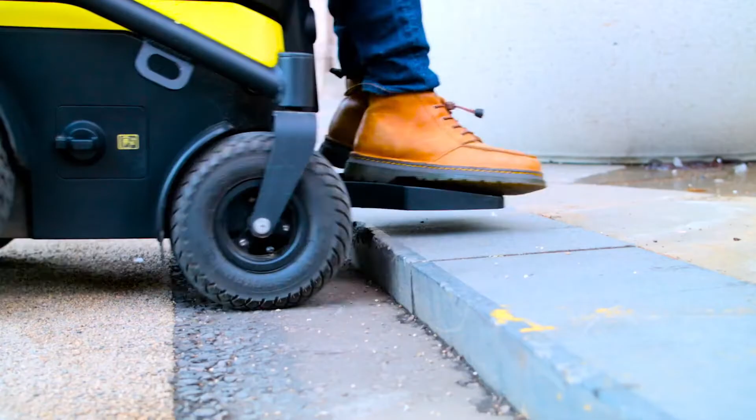Working for Freedom One Life was an opportunity I couldn't refuse. It was the type of job I'd always wanted to get involved in, especially one with such a great backstory, with an inspirational founder who was trying to revolutionise a stagnant marketplace with something really quite innovative, which is going to benefit that user group considerably and allowed people to live the lives they choose.

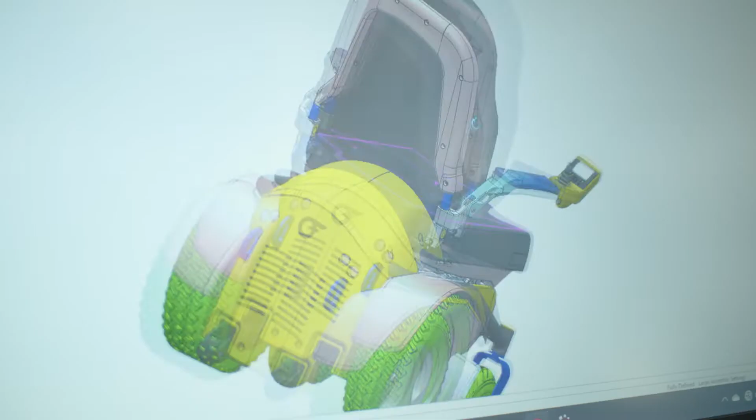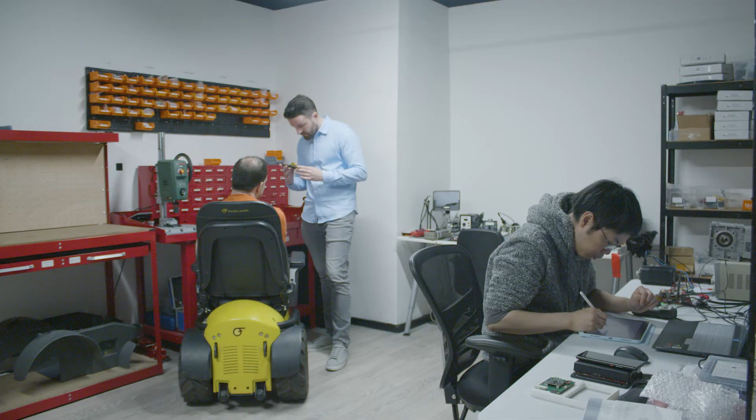I started Freedom One Life because I am a powered wheelchair user. I've never had a chair that could keep up with my life, with work and travel. I always had breakdowns and problems in the UK and around the world. And when you rely on a powered chair for your everyday life, when it breaks, basically your entire life has to stop until you get it fixed.

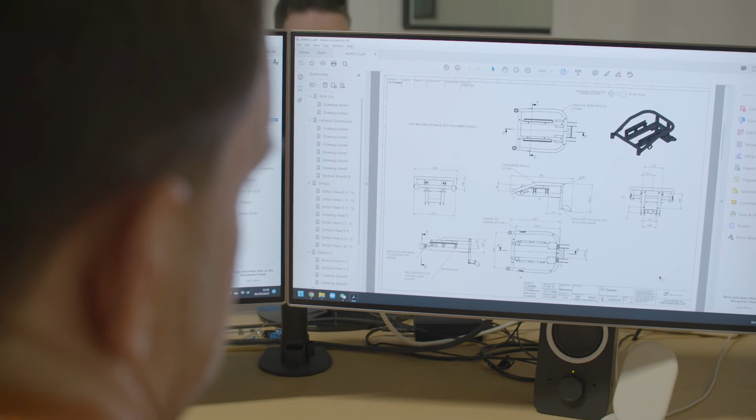Which can sometimes take weeks or months depending on the problem. And every single person I spoke to who owned a power chair had the exact same problem and this fear around what might happen to the chair. So I started this company to create a more reliable, more dependable product that people have a lot more trust in.

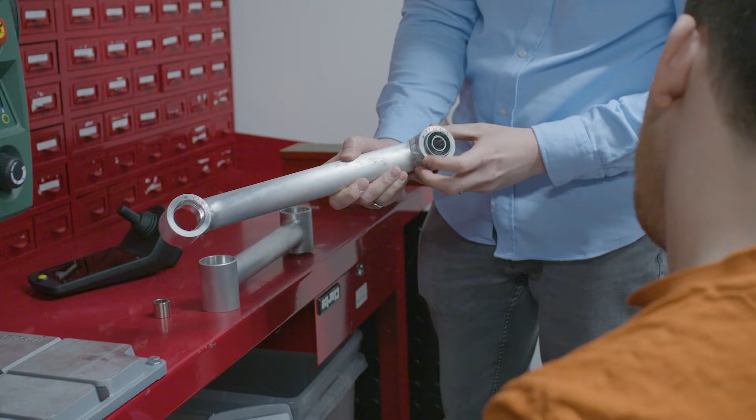SOLIDWORKS has enabled us to take the chair from very basic concept prototypes all the way to a market-ready product.

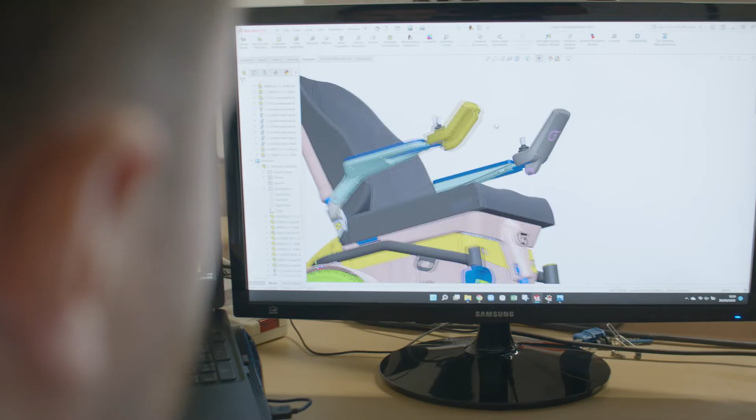The Startup Program is an excellent opportunity for startup businesses in general. Money can be a limiting resource for a startup business. The Startup Program takes that pressure away and allows you to get that first year runway in product development. Get your product, probably, depending on what it is, 80 to 90% developed, the bulk of it, which in turn will either allow you to get to market perhaps, or find other funding mechanisms to allow you to obtain that license for the following year.

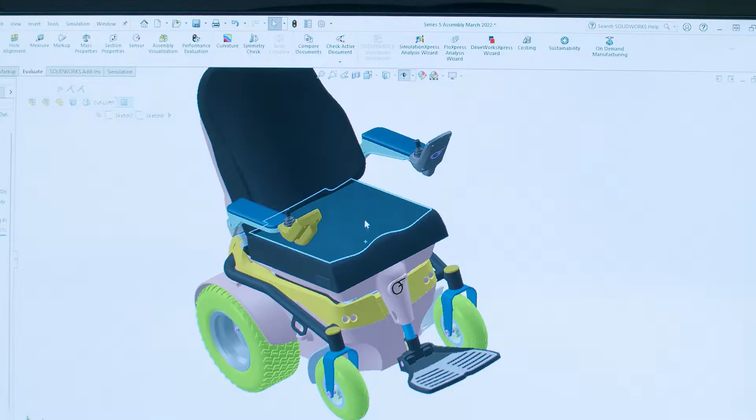Filled in the application, and before we knew it, we had the full SOLIDWORKS suite that we would need to develop our product.

Our chair has our own custom lithium battery, which offers at least 4 times the range of every other chair on the market. With higher torque, you can climb curbs much easier, you can go up hills with no problem. Obstacles that a lot of power chair users would avoid naturally because they would deem it as being maybe too risky. We've got a power seating system, which allows for the user to lift to a social height.

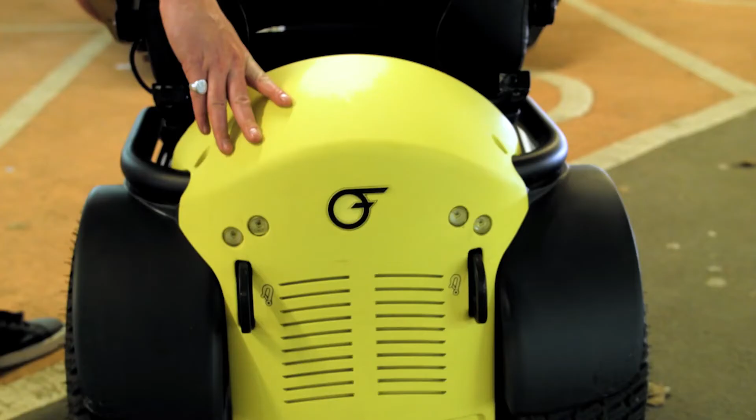We also have an onboard charger. So we've also designed around transportability. So our chair is 30% lighter than like-for-like chairs on the market.

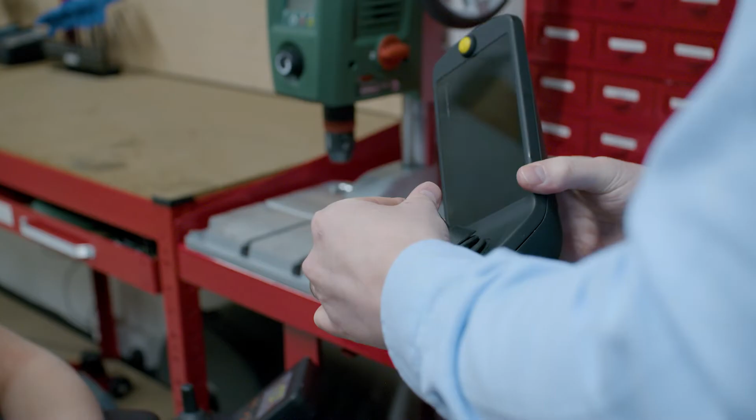Another package which was extremely important to us was simulation. We used that on several occasions to validate components before either prototyping them to save cost or before testing them.

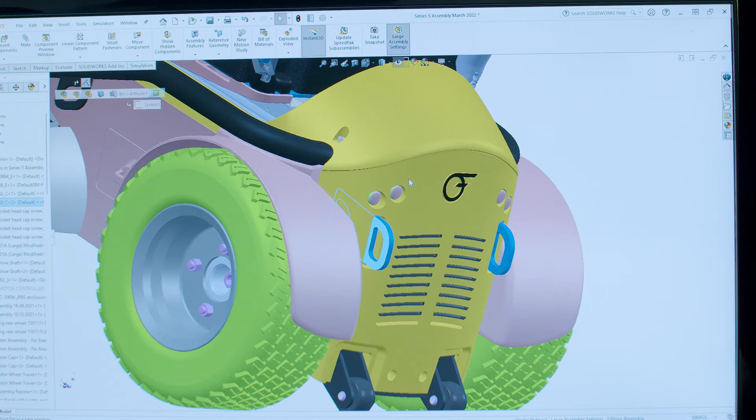As part of the mechanical testing of any electric wheelchair that is going to be used as a seat in a vehicle, the chair needs to pass the difficult crash test. FEA became a very valuable tool to us when developing the tie-down points, the anchor points for the chair that would attach it to the sled. Nice to say that we passed that test first time, and that was one of the most difficult tests we'd have to conquer.

Slightly further down the timeline, we introduced Composer. We use Composer predominantly to produce supporting images for our user manual. SOLIDWORKS provides a great starting point for any digital renders that we need to put together, which could be used for customer facing the website.

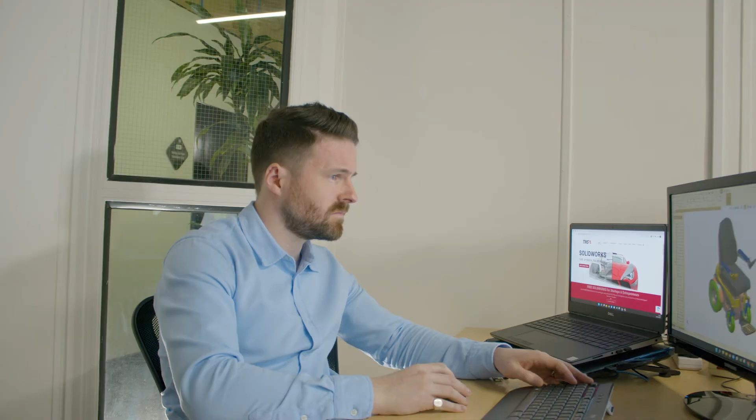Great marketing tool. Our reseller, TMS, they helped us in a number of ways. Firstly, when it came to installing the software and downloading the files, they guided us through that process smooth and easily. Beyond that point, if ever we had any technical issues, TMS were always on hand to guide us through those problems, and were very quick and effective in giving us solutions to minimise downtime.

I would definitely recommend the Startup Program to other entrepreneurs. In my opinion, SOLIDWORKS is the best CAD package on the market, especially for mechanical products. So for me, it's the only option.

Our next vision is to make a more affordable power chair for the lower end of the market, which will cost around £5,000, and that will be a much higher volume and lower price model for people that use a power chair but they don't need it all the time. So it's more like a portable version. Other than that, I see Freedom One Life becoming like a market leader in innovative products for mobility and disability.